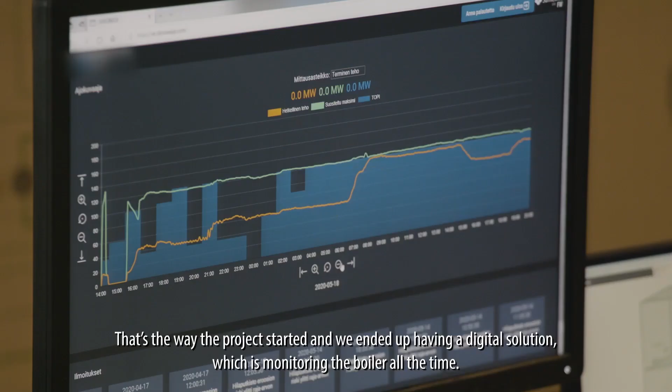A couple of years ago, we started to think what will be the next step. We had a lot of options to buy a completely new biofuel plant and also different geothermal projects, but we ended up with the idea that we have an old boiler designed for oil. Nowadays we have changed this boiler completely for biofuel use. When we started the boiler, in a couple of months we noticed that the boiler is capable to produce even more energy. That's the way the project started, and we ended up having a digital solution which is monitoring the boiler all the time. We can run it sort of overloaded safely.

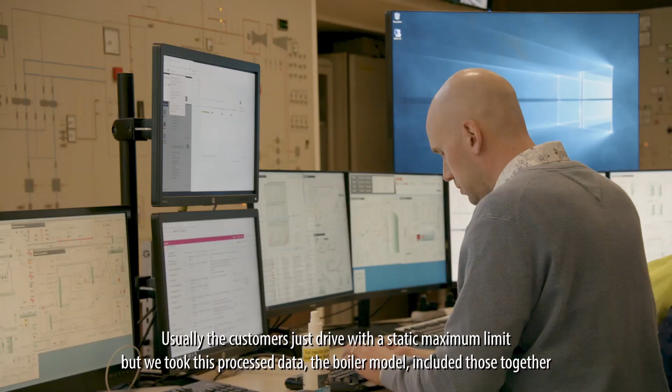What we did in the project was that we took the process data, we had the boiler model, how much they could run, maximum, minimum, with a certain portfolio of fuels. There is a big variety of the maximum and minimum capacity. Usually the customers just drive with the static maximum limit, but we took this process data and the boiler model, combined those together and got the real data-based maximum for the boiler with that current fuel.

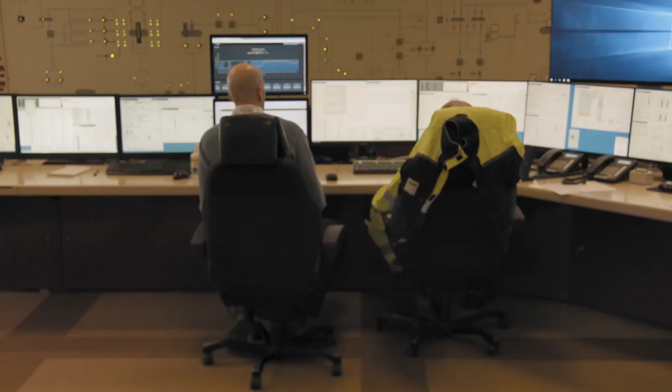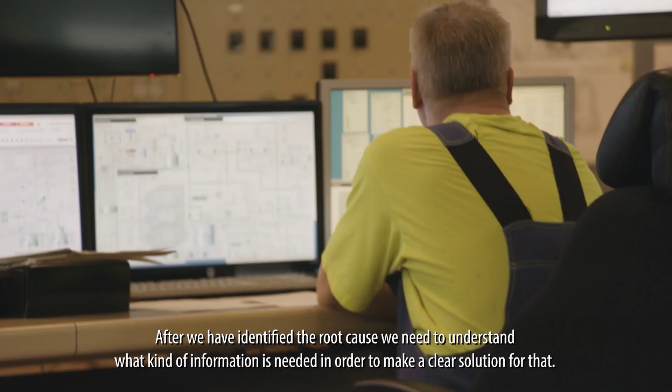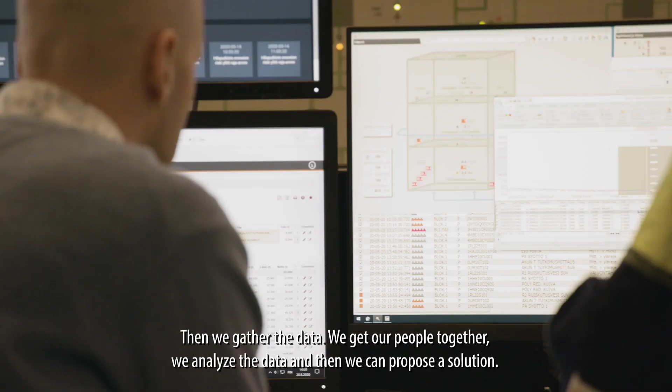Vantaan Energia was a perfect customer for us in this co-creation. First of all, they are progressive. Secondly, they are utilizing data and data analytics for the operation. And thirdly, the culture is transparent. Perfect match for this kind of co-creation. After we have identified the root cause, we need to understand what kind of information is needed in order to make a clear solution for that. We discuss with the customer, we interview the operators, we interview all the stakeholders related to that specific challenge. Then we gather the data, we get our people together, we analyze the data, and then we can propose a solution.

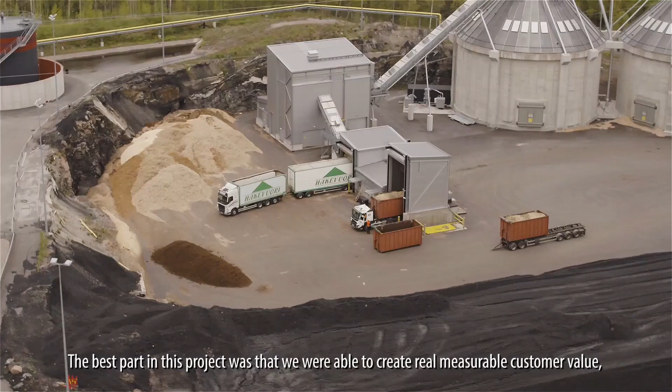The best part in this project was that we were able to create real measurable customer value. By maximizing the bio production, we were able to decrease the coal production. I would describe it as very easy from the client side. We told them what we want, and we had a few meetings. We started to raise the idea from zero to the product. They are quite good at that, I must say. I would not say that it was consultant work. It's the supplier who knows what their goal is, and they really work hard at that. Time-wise, the project was, in my opinion, quick. When we first started, we expected something like half a year, 1 year, but it was quick.

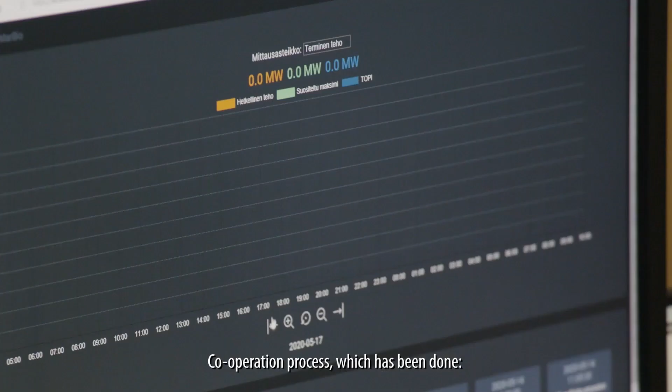I think the main advantage is we got maximum benefit from our investment, that's one thing, and also when we can run the biofuel plant at maximum available power, we also get less CO2 emissions, so it's very good for the environment also. I was amazed that they reached the goals and they stayed more or less in the original plan. The cooperation process which has been done is huge for us because the product is actually made for us. It's designed for you, for the plant. It's an excellent product because the boiler manufacturers have so much knowledge. I'm very happy with that one.

So, how did this story begin and how did we get here in this launch webinar? First of all, SFW started a company-wide innovation program in autumn 2018. The main purpose of the innovation program was to widen SFW's product and service portfolio to meet changes in the global energy market.

SFW started this dialogue with current customers to identify real customer challenges where SFW as a service and technology provider could bring the best knowledge and thus develop new types of solutions to meet customer challenges. All this to be done with a co-creation model, applying service design and agile product development methods.

In practice, this means that we start with minor investments for proving the concept and collect valuable data. In case the proof of concept has been successful, we start developing and designing a real solution but keep development and customer feedback cycles fast and thus cost effective. In case the proof of concept had not been successful, we would have stopped development activities and changed the angle of development direction.

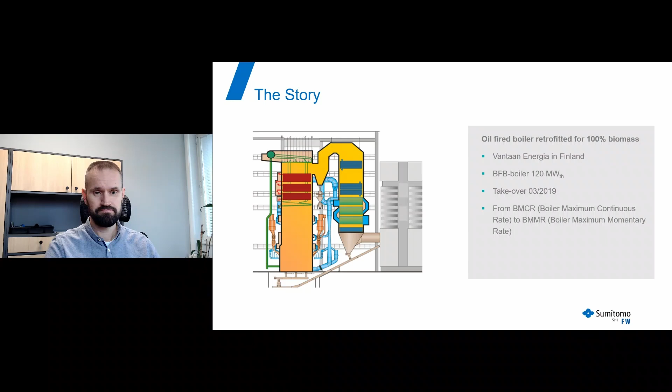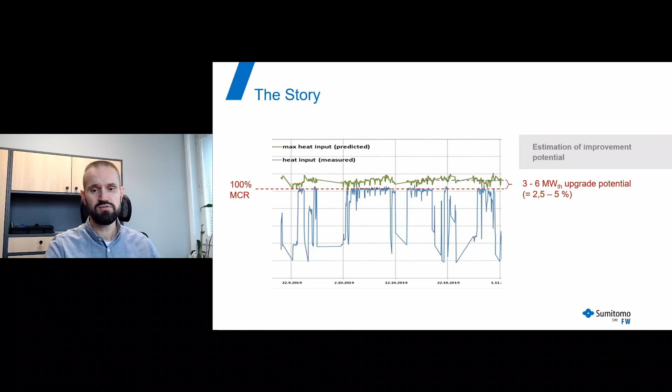Operators were instructed to follow our BMMR recommendation during the 10-day test period. Soon after the test period, operators returned to their previous normal maximum load operation mode, which was, as you can see, lower than our BMMR recommendation. After this test, the customer was convinced that this service will bring tangible savings in their operation, because they can partially replace higher cost coal firing with lower cost biomass firing. After the MVP test, we started to negotiate with Vantaa Energia about commercial terms and schedule. Finally, commercial use of this first digital service solution was started in April 2020.

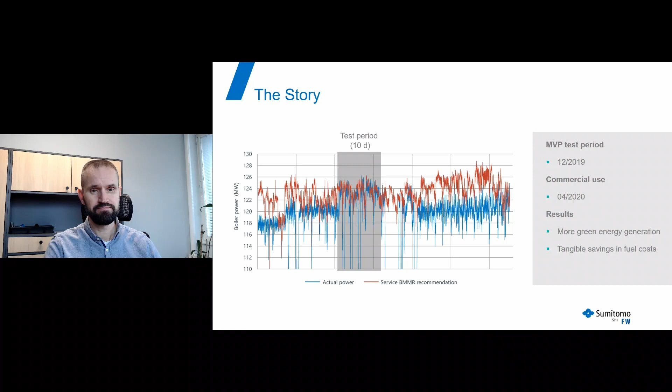At last, we are so proud to present our new digital services brand, the Izana product family. We have joined our forces in digital development with our owner, Sumitomo Heavy Industries. Our Japanese colleagues are focusing on a bit different type of services, and those will be launched later in the future. It means that the Izana product family will be growing with some very neat products and services. But let's first focus on our current digital service portfolio.

And before going into details, a few words about Izana. You might be wondering, what does it mean? It's ancient Japanese, meaning something like leading or guiding in the right direction. And I think it reflects our digital services just perfectly. We also want to help our customers make better decisions based on real-time data and thus guide them in the right direction.

In our current toolbox, we have the following services. Envelope to boost your boiler performance. Bed management to increase your availability rates. Fouling management to optimize your soot blowing cycles. Those three are more or less focusing on improving boiler performance and reliability.

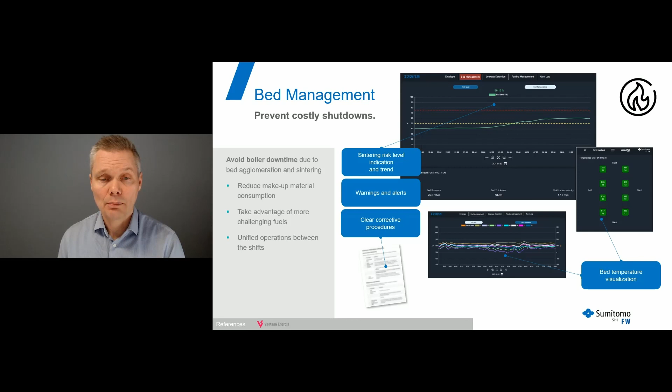Let's see an example of actual shutdown avoidance from January. And this is January 2021. The bed management service has just been deployed for our customer. Our services always include 1 month of free monitoring service. This service noticed an increased risk level on Monday evening and asked our expert to check the situation. On Tuesday, we also notified the customer about this and verified they were aware and prepared for the situation.

And later on Tuesday, the bed management application on the customer side raised the warning and remedy actions were started. Flushing the bed usually takes some time, and since the risk level didn't turn down immediately, the remedy procedures were increased. Next morning, the application showed a red alert, and at that alert level maximum remedy procedures were applied. Our expert also visited the site to ensure this and also to check the situation and take some samples.

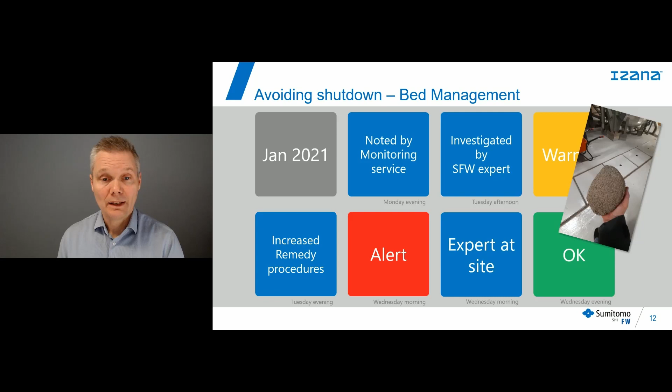Then the next application, and this is coming fresh out from our development: the fouling management. Knowing the right soot blowing interval of your boiler is challenging yet important. Too frequent soot blowing causes accelerated wear in boiler tubes and uses excessive steam. On the other hand, lack of proper soot blowing allows fouling to degrade heat exchanger performance.

And just like the previous application, envelope and bed management, this application also unifies the operations between the shifts and operators. So with this, every operator uses the same knowledge and follows the same best practices the same way.

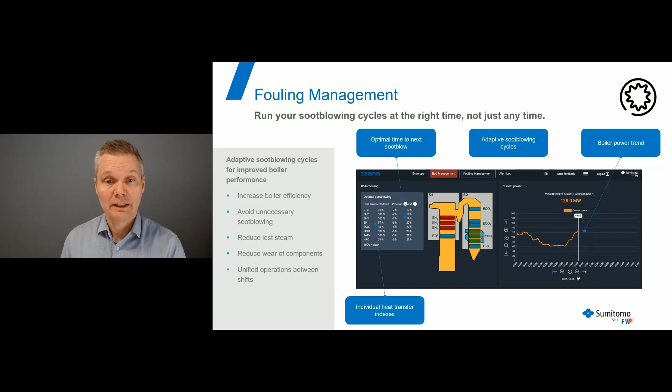Next, we'll take a look at the leakage detection application. And as you know, the risk for boiler tube leakages is largely managed by the regular boiler inspections and proactive maintenance. But nevertheless, all leakages cannot be fully prevented by conventional offline methods. When a tube leakage occurs, immediate reacting and prompt shutdown of the boiler can be crucial in minimizing production losses and repair costs.

With the leakage detection application, you can detect and identify even small water and steam leakages with the existing process instrumentation. No need to install any special sensors here. This is possible by utilizing sophisticated methods to detect deviations from the normal process state. The same methods also can assist you in identifying the leakage locations.

So this application will not prevent the leakages, but with it you will avoid secondary damages and excessive repairs with leaking high pressure steam parts. And you can minimize downtime and production losses. We have now visited 4 advanced analytics applications and it's time to move to other highly requested digital services.

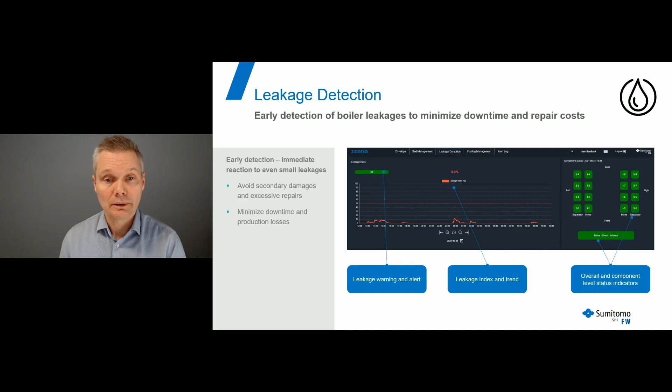Process view with the basic overview is included with all systems. We always customize it to match your boiler configuration. Process view collects the main process values in a modern graphical user interface. In addition, we also provide some additional back-calculated values from boiler balance calculation that are typically not available in your DCS views. For example, boiler efficiency, heat to steam and fuel flow.

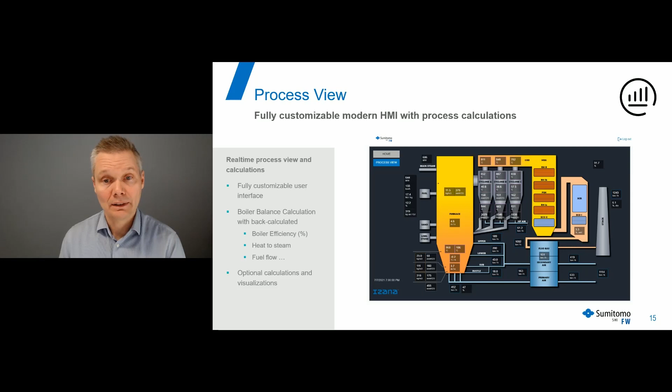The basic calculations use air, flue gas, steam and feed water information as inputs. So this comes included and can be customized according to your needs and preferences. Additional views can also be designed and taken into use in a matter of days.

Then the Data Explorer. We rely on Azure standard services in all development and offering. Our cloud-based trending solution is based on Azure Time Series Insights. With Data Explorer, you get real-time data trending anywhere. You can monitor the health, usage, and performance of your assets. With it, you will get full in-depth benefits from our analytics and learn new insights. For example, what is causing an out of balance process.

The tool comes with fully customizable views, long-term trends, and great options to visualize the data. For example, chart lanes and different chart types. The nodes or tags, data points, are contextualized and come in customizable hierarchies. And as you would expect, they are fully searchable, which comes very handy when building the views and exploring the data.

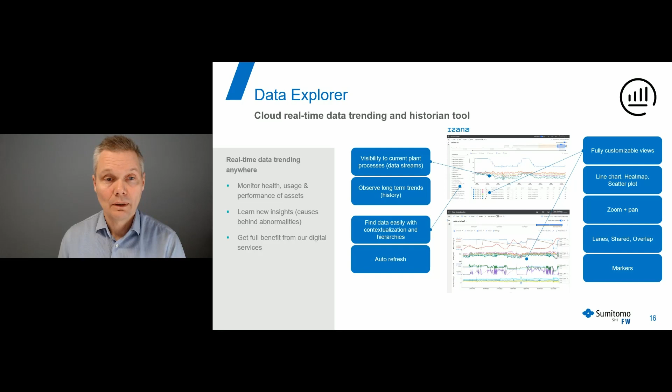Then continuing from these views, we can go to the reporting platform, and this is where you can see the views in report format, and also build other kinds of reporting. Various reports from boiler operations are constantly required. Emissions, fuel consumption, and energy production need to be reported on a daily, monthly, and yearly basis.

And Power BI as a reporting platform makes customized and interactive reports possible with extensive visualization capabilities, and using Azure for data handling gives you easy and fast access to these mandatory reports. Furthermore, combining the reporting with our analytics products will give you more benefits by creating detailed insights from the boiler processes.

So now, we are ready to move to the third type of services to be covered today, and that's the advisory services. This is where we combine years and years of industrial knowledge, all our digital technology, and best-in-class customer service. Taking care of your success is our top priority. If you need to tackle abrupt problems occurring in energy production and want to understand the boiler behavior better, or increase your boiler operators' confidence, then the remote advisory services will come to your help.

We ensure optimal performance for your boiler and help avoid boiler downtime and repairs that are often caused by secondary damages. SFW Expert Network is there for you the way you prefer. It can be simple periodical monitoring and reporting, or contacting and acting fast when needed, process consulting, or even a 24/7 standby advisory. And that concludes the walkthrough of our digital services offering.

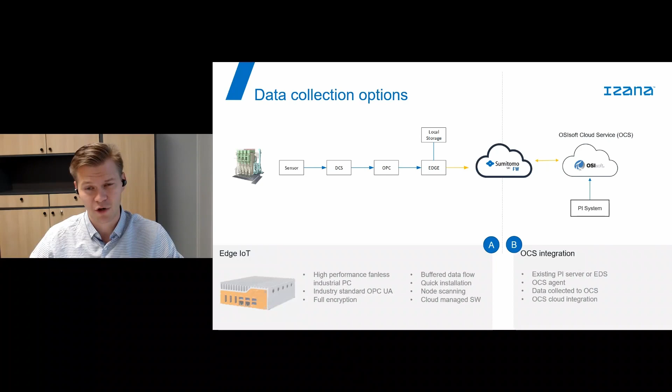High-class cybersecurity and data privacy is a valued topic for us and also for our customers. We care for the data through its life cycle. Customers value that they keep ownership of data while using our products and solutions. Customer data is fully isolated and encrypted both at rest and in transit.

We follow the security best practices throughout the development, deployment, and operation of our products. We use modern tools to authenticate users. Customer-controlled single sign-on and IP restrictions are available, and security audits by industry-leading partners can be selected as part of the deployment.

Digital services rely on 3 strong areas of expertise which are combined to IZANA. Power plant knowledge. We at SFW have decades of expertise on designing and engineering boilers. We have our own boiler manufacturing and world's best understanding of fuel stack. We have the expertise to evaluate feasibility of a change.

Optimization of performance, production, consumption, and availability play a key role. We combine fuel and material knowledge, also taking into account equipment lifetime estimation and risk mitigation. Asset analytics. We have gathered process data for 20 years, built analytics and algorithms, and then there is the understanding on process technology and understanding fields. We have a dedicated full-time data analytics team, and we utilize modern tools on Microsoft Azure platform.